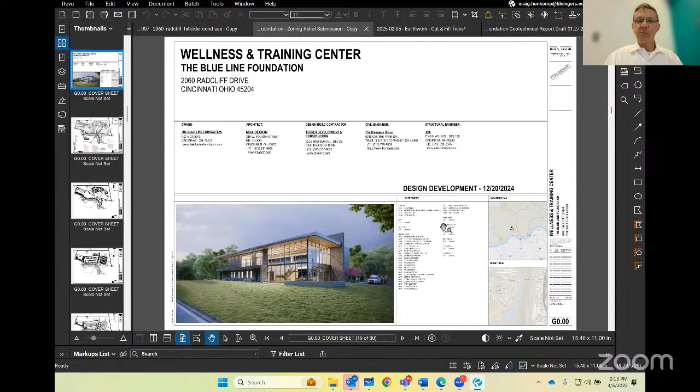So I think I'm gonna do that before you even get started, because I recognize this property and the Blue Line Foundation from a couple prior applications. So I'm sure you were planning on mentioning this, but as you go through, if you could try to highlight where this is different, if at all, and how that relief is different than relief that I've approved in the past, that would be helpful. But otherwise, please feel free to share screen and move forward.

Yeah, so I believe, and Wes, it's been a little bit since I looked through the previous application because we were not the submitters on the previous application, but I believe they did have the conditional use component also because of the ballroom aspect and facility, so I think that is the same. They still had the two structures, so the variance for the front yard component was the same. And then the hillside district, while our layout is similar, there's some slight differences that I'll point out as we're going through. But as far as the variance, the locational variance for the accessory structure in the front yard, I believe the previous application had that and was also a part of it. And the conditional use, I believe, was also the same. Those would basically be exactly the same then. Okay, yeah, only to the extent you're aware of specific differences. I know that Wes mentioned some things in the staff report, so he can touch on that as well. Yeah, Wes, heads up, I'll ask you the same question.

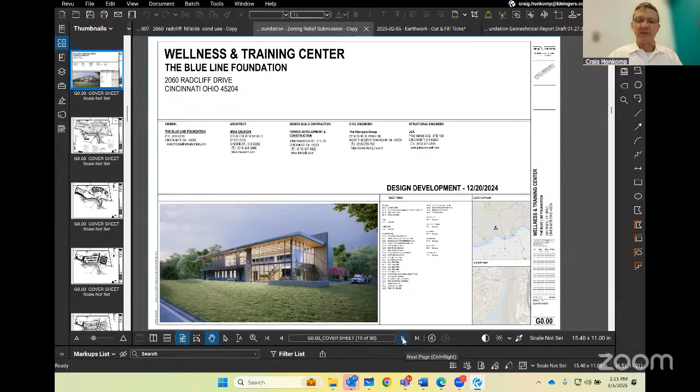Great, so I will go ahead and share screen again. Yes, I will run through the drawings that we presented. I think that'll be our best way to highlight some of the talking points here. And I know Wes put some of these images in the staff report. So just an overall image of the building on the title page is the main reason we included this page, just so you could see that graphic in the lower left corner of basically the aesthetic of the building. And we do have elevation views coming up also.

So a topographic survey, we did do a new topographic survey, did not reuse anything from the previous submittals, so this is all on our benchmark system. Generally the site is higher on the left end, which is the south end of the site, then closer to where the call center is and the other buildings up there. And you'll notice the irregular shape of this.

In the geotech report that was submitted, this whole general area was used as a borrow area when they constructed Union Terminal, the Cincinnati Museum Center, in the 1930s. There was subsequent excavation and removal of rock material, and fill was placed back into some of those excavation areas. Over the decades since then, this site has kind of been moved around, with soil, borrow material, and fill material placed.

So in the geotechnical report, you see lots and lots of fill in the areas through here. In some of these, like on this left end, it's just kind of a random mound of fill that was placed there.

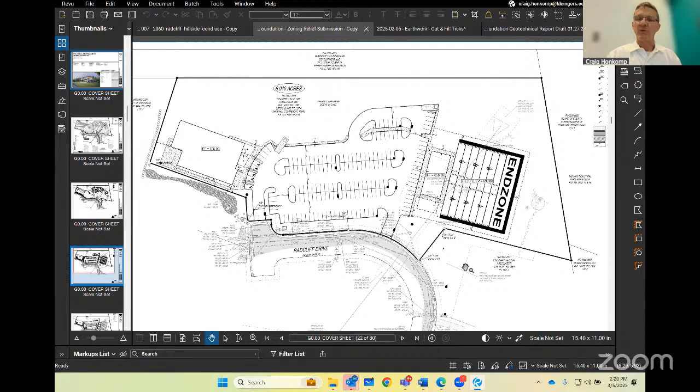The building here is the one that requires the variance because technically it is in the front yard. As Wes pointed out in the staff report, this used to be several lots through here, and it could potentially be split in the future, although that is no intention of what the blue line would do. This would be the fitness center building, associated with an outdoor turf area for outdoor calisthenics or other exercise regimens that the officers or law enforcement would go through. So that's the general program.

Utilities I'll skip over pretty quickly, it just has the typical water and sanitary taps and services going to the different buildings that have been coordinated with Waterworks and MSD.

What's relevant to the Hillside District on this page is that we're collecting all the water from the rooftops and the impervious areas of the parking lot, and we're keeping that. We're not dumping anything over the hillside. Nothing will run off down the steep hill around our perimeter. All that stormwater is collected, put into the stormwater management basin, held back per MSD and SMU standards, then discharged to the storm sewer in the street here in Radcliff. So nothing will be directed over the hillside from our impervious areas.

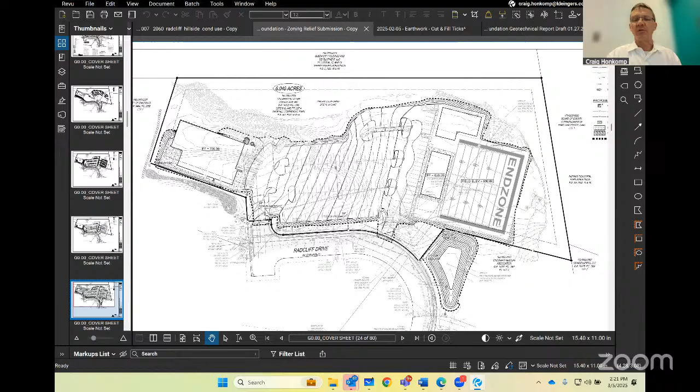Here you can see the grading. The previous applications were encroaching a bit further over this hill than what we are. This mound here with all the contour lines is really an artificial knob, where somebody dumped and placed fill decades ago, mounding it up. There were rather large trees growing on it that had been there that long, but it wasn't really part of the natural native hillside. So we're shaving this artificial hill off the top, and not really touching where the native, natural hill is beyond it.

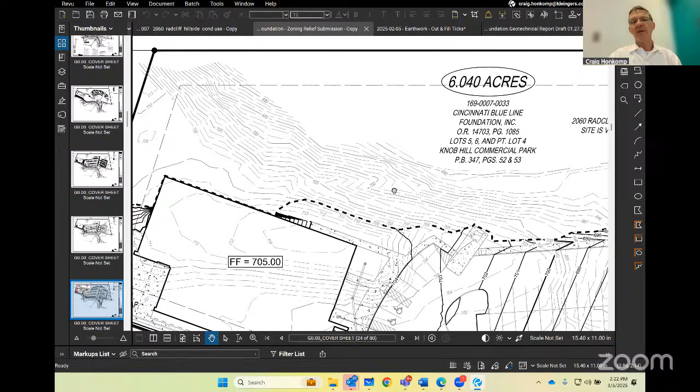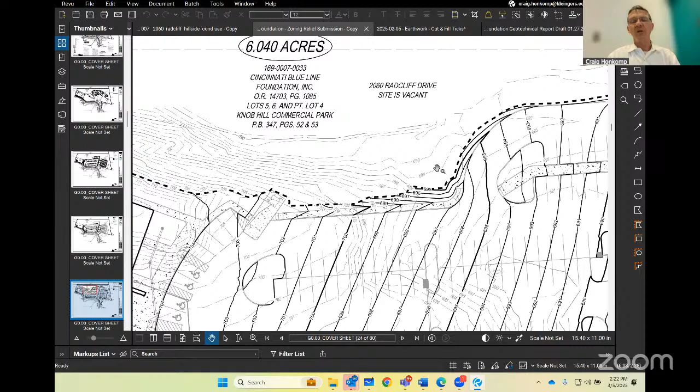Similarly over here, where we topoed is more mild slopes. The real steep drop-off is much further into this wooded area than the edge of our survey limits. The previous submittal actually had a retaining wall running along the edge of this parking lot through here. By reconfiguring the parking lot slightly and tightening things up and working on the grading, we're not doing a retaining wall there or anything like that.

So I think that is all beneficial to the Hillside District and to the impacts that this property is having on the land in this area.

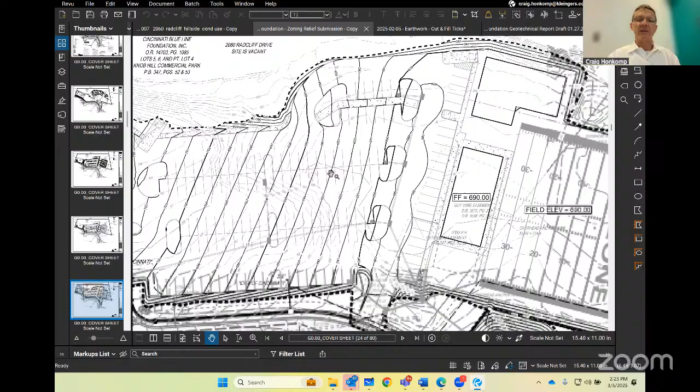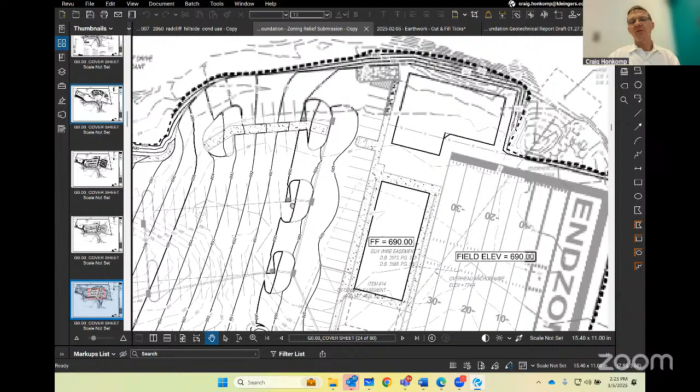Basically, we're cutting where that building is on the left. You can see there's this knob protruding out here again of that fill, and we're removing just slightly a bit of that knob. The soil from those two areas we're cutting off gets filled and placed in the other area of the parking lot. Lastly, the excavation for the stormwater management basin—those soils will also be placed up in this area where the field and future building will be going, in essence trying to balance the site and not have large amounts of import or export of soil. I think these perimeter points around are pretty similar to what the previous approval showed.

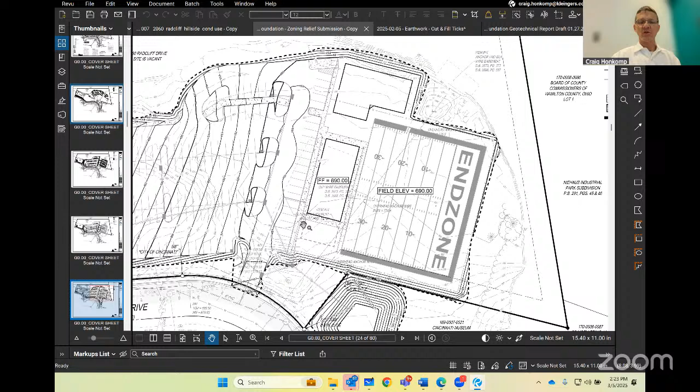This was just the landscape plan, conforming with the city landscape code. I don't think there's anything to really add—it meets code, is what we're doing through there.

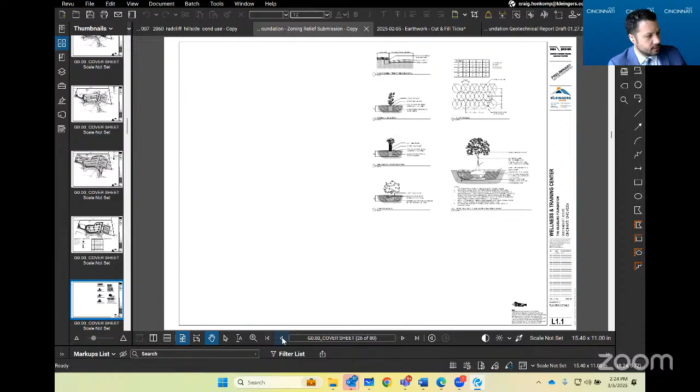I'm sorry if I missed this, but looking at the satellite views, there's a decent amount of vegetation and trees along the hillside. Do you have a sense of how much of that will need to be removed for this project, and whether that will impact hillside stability?

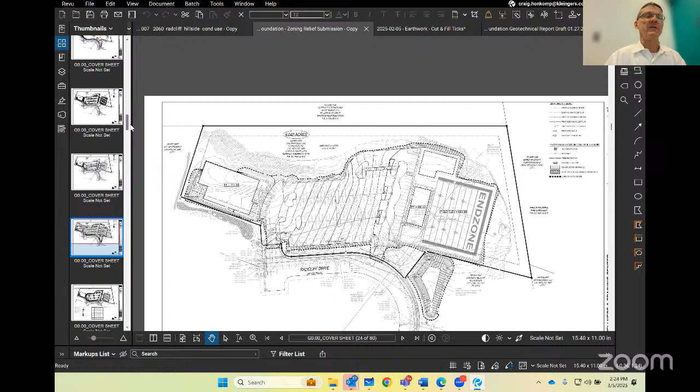That's a good point. Let me go back to the grading sheet, and I'll also go to the aerial image here, because this doesn't show it too well. I'll go to the demolition plan—the thick dashed line here is our clearing limits, around the perimeter. Going back to the demolition sheet, you can see these areas through here. A lot of this was honeysuckle and scrub and stuff.

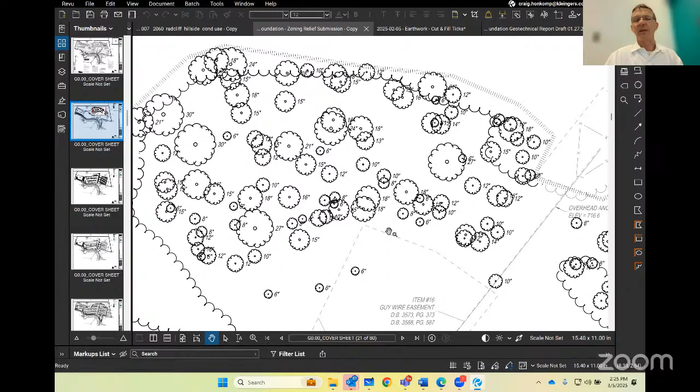This area had been disturbed back in the 30s or 40s, and a lot of these trees had grown up since then into larger individual trees. But those trees will be cleared to allow the grading to happen in the parking lot and the field. We're not really clearing on the steeper parts though.

I guess we didn't have the topography overlaid on this. Let me go back. I think the survey had it, and like I said, the steeper part of the hill is where we didn't even survey, kind of the white area, and we're not really touching that.

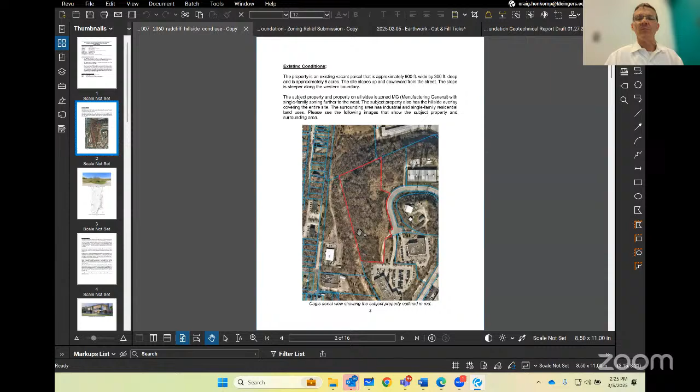I'm going to flip to the aerial image I know you had in here, I think this is a little bit helpful to see. You can kind of see this white banding along through here - that's really where the steeper part of the hillside begins.

This area where the vegetation is mainly is not as steep. You can recognize that on a very steep slope, there's not a lot of vegetation that grows - you get maybe cedar trees and stuff. So we're not disturbing that.

But this top area, that one mound, that'll be cleared. And then these areas here where the field and the parking lot will be, cleared out also. But then nothing beyond our disturbed limits will be cleared.

Is that - okay, yeah, thanks. Okay.

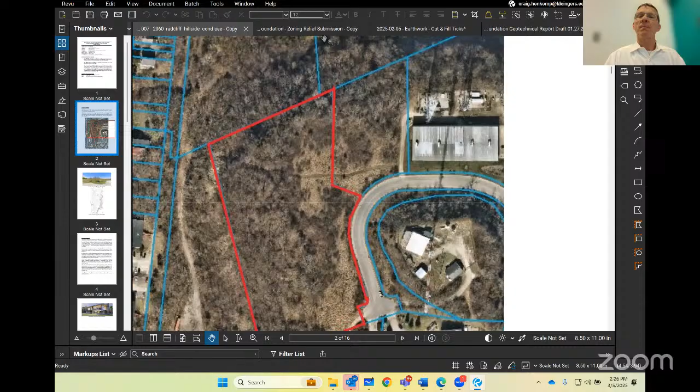Let me go back to my other screen here. I think I need - that's not the right one. There it is. Okay.

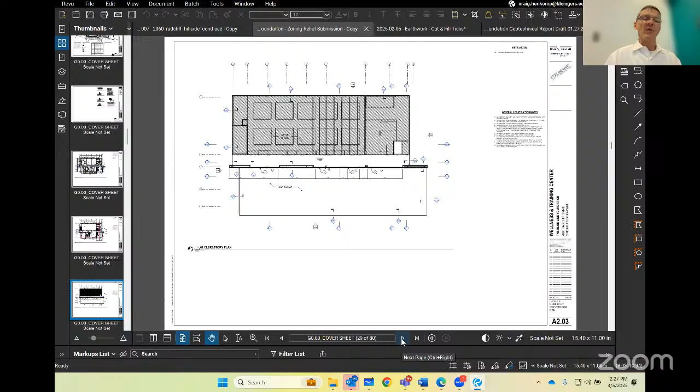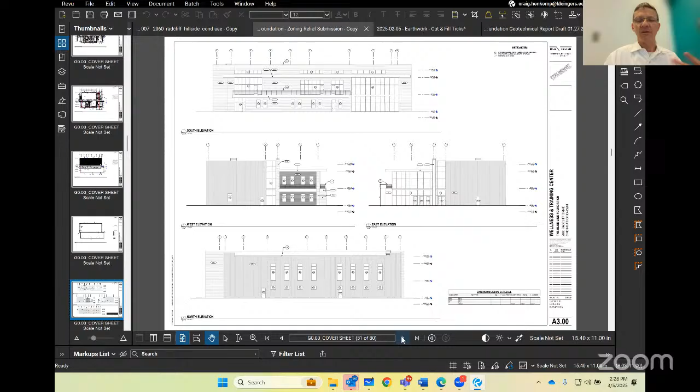Then we have the elevation views coming up on this page, which basically reflects what was shown in that image on the cover page. And I know height - we don't have a height issue or variance or anything like that. So here's the fitness building that's over by the practice field. And then the geotech report.

So I guess Nestor or Zach, do you guys want to comment maybe a little bit more on the floor plans, and I can flip through them if you'd like. Zach, do you want to go? I think you covered it pretty well there in general, Craig.

Yeah, David, is there any additional information you want to hear? I think Craig covered it fairly well, as Nestor said. You're muted, David. Sorry guys. No, you're good. Yeah, I don't have any additional questions about the slides we're seeing now.

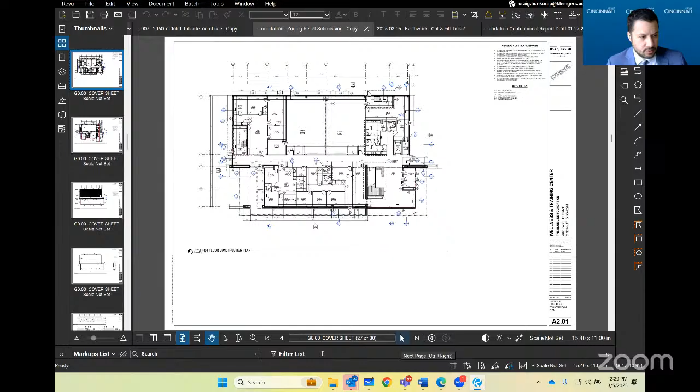So this is mostly related to the conditional use approval for the accessory event space, right? Yep, correct, exactly. Yep. Yeah, no, nothing right now. Okay, yep. And so I think the other information that was in our submittal is a lot of the supporting documentation with the geotechnical report.

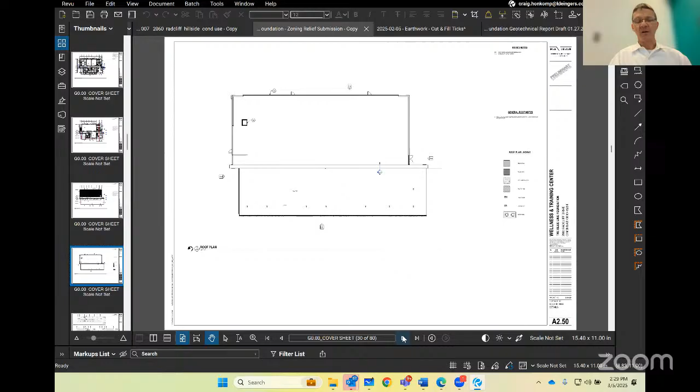Our community engagement that was performed along the way on this project, the letters of support that we have - yeah, so I don't know that we need to go into those, those are very similar to last time. The geotech report is a new geotech report, but it's kind of a lot of paragraphs.

So I think, David, with that, I think that wraps up my presentation of everything that we have submitted here, basically. Okay, great. Thanks, Mr. Honkomp, appreciate that thorough presentation. Did anyone else from the applicant team want to say anything else before I move to the planning department?

Okay, hearing nothing, I think I'm going to go to the public now. Mr. Lindenberg, did you want to add anything to the conversation here?

No, I'm a trustee in Green Township. Whenever we have zoning issues, we always ask if there's a neighbor present, and there never is one. So I thought I'd join today to be that neighbor present and say I've been talking about this project with Steve Saunders for seems like 10 years. So we're thrilled that it's happening. It's the perfect neighbor for us, and we're excited to see it built.

Okay, fantastic. Well, I appreciate you being here. Thank you for your time and your testimony here today. Let's move over to Wes. Wes, what would you like to add here?

Hi, I won't really get into any details of the staff report as outlined by Mr. Honkomp, but I will just highlight that this version of the project compared to the 2022 version does have a smaller parking lot. It doesn't quite get as close to the edge of the hill. Has a smaller field, the athletic field area, again not quite as expansive. The building footprint itself is smaller in that it's like an L shape instead of a rectangle shape, so there's a smaller footprint slightly than last time.